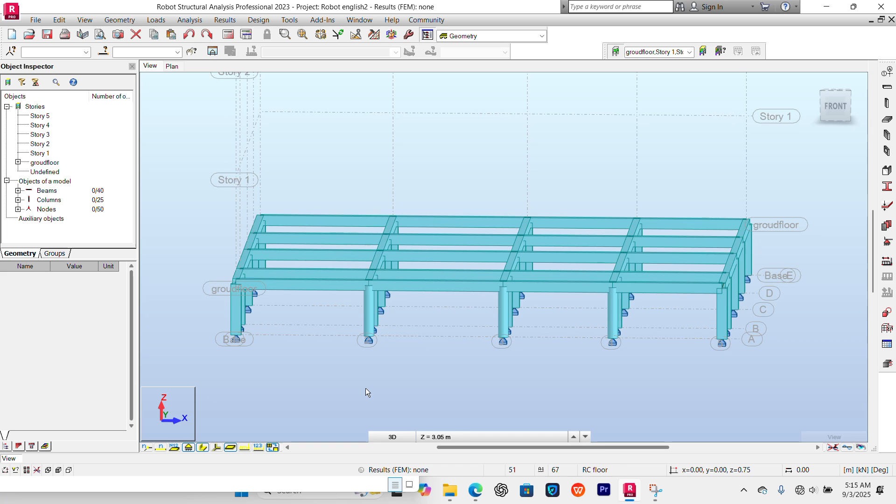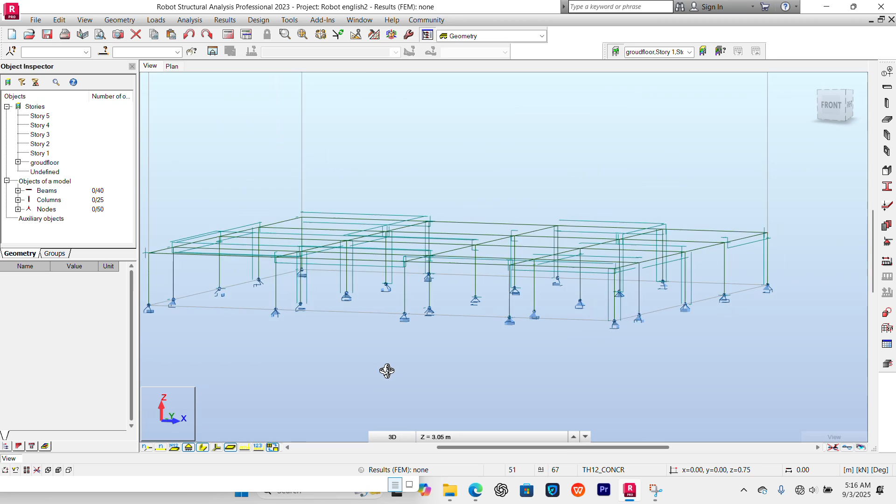Thank you. So last time we ended our lesson on the modeling of the foundation beam. Today in this new lesson we are going to continue directly with the orientation. We first of all check the orientation of our dwarf pillars. We'll go on plans, then we'll come here.

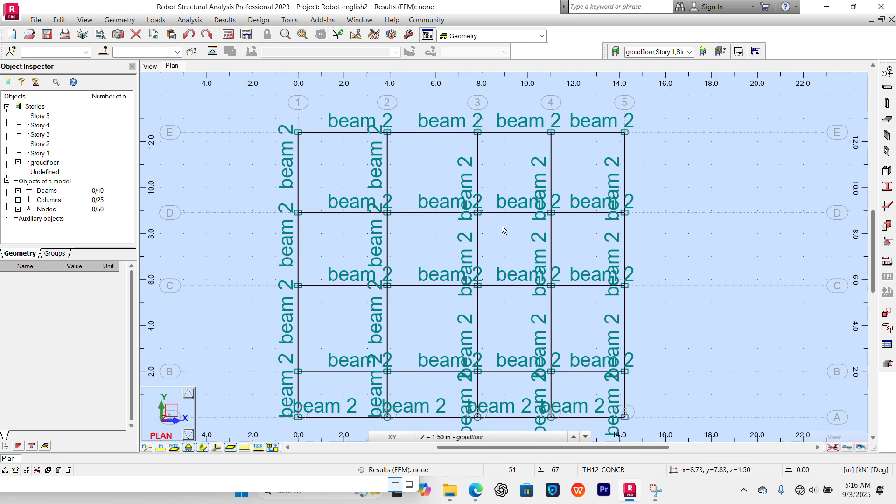First of all, you'll realize that the formwork plan has changed. Last time we started without a formwork plan. This is a formwork plan I found in one of my documents, so we'll be using it for this project. As you can see, it's the exact one I've modeled to the level where we ended. Today we are going to talk about the orientation of this column.

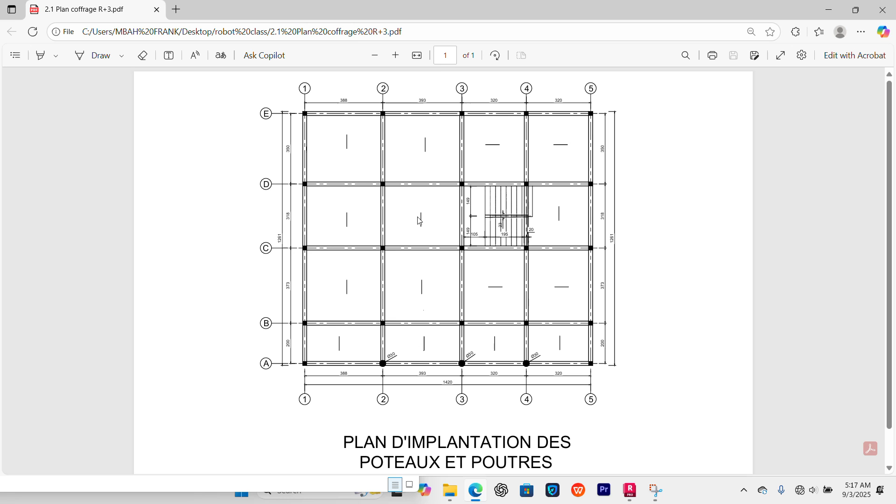One thing to notice is that on this formwork plan, the columns are all square columns, but on the project we decided to work with rectangular columns. The orientation of a square column does not matter, but for a rectangular column we make it in such a way that the width of the column should be oriented following the long span. That means the short side of the column should be oriented accordingly.

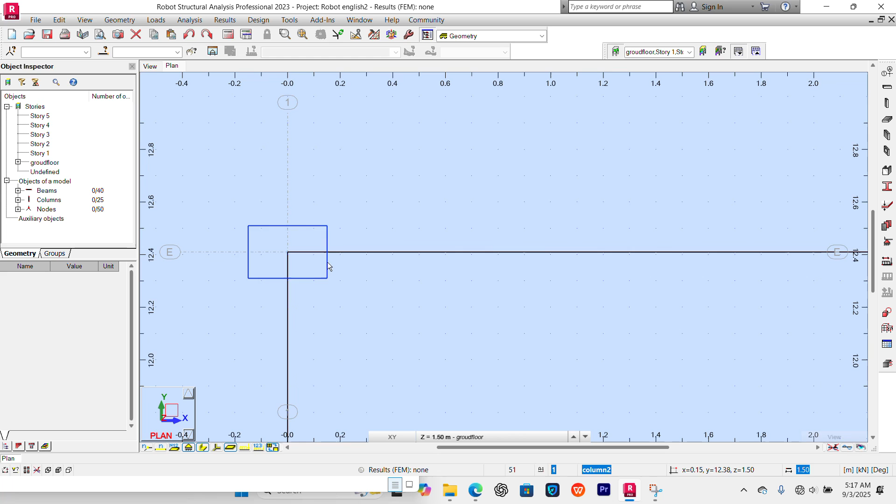If this is the longest span, compare this span of beam 26 and this span of beam 41 - the longest one is surely this one. The short side of our column should be oriented following this side. That's what it means - the width of this column should be aligned with this long span.

It's a mechanical principle to reduce the effort when applying the ribbed slab here, because if this is the long span, we'll be sending the rib beam this way, oriented along this short span. Obviously this column will have a certain deflection at this level which will influence this column here. So it's a mechanical principle that you have to check.

I've done this before in one of the videos, the orientation of rectangular columns particularly. To check that, we'll go on tools, take dimension, and measure this span to avoid missing it. Let's take it back, click here, click on this other joint, click on this other, then put the dimension. We'll ensure the dimension is there to control our span every time.

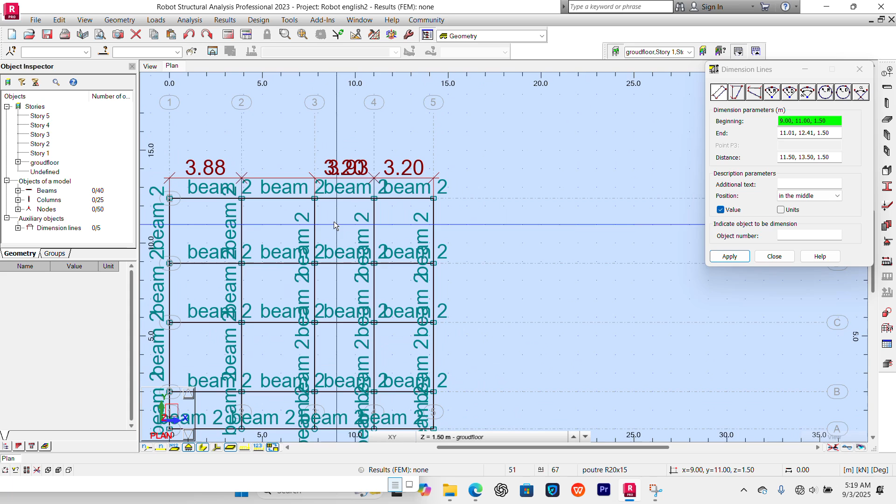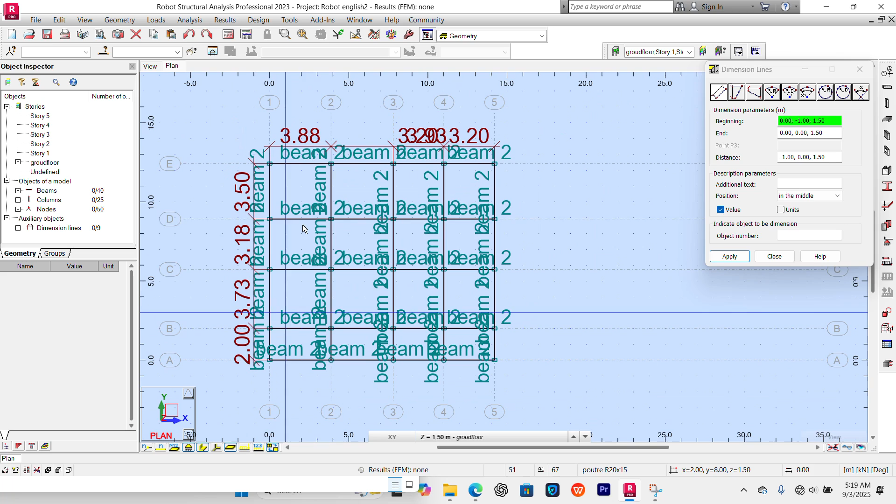This is to ensure that we are not making errors. Come here and put also the dimension on this side. Quickly put the dimension. That's it, we are done. Let's delete this one and draw it back. Dimension line - you go on tools, click on dimension, then you choose the dimension. That's it, so we have all the spans.

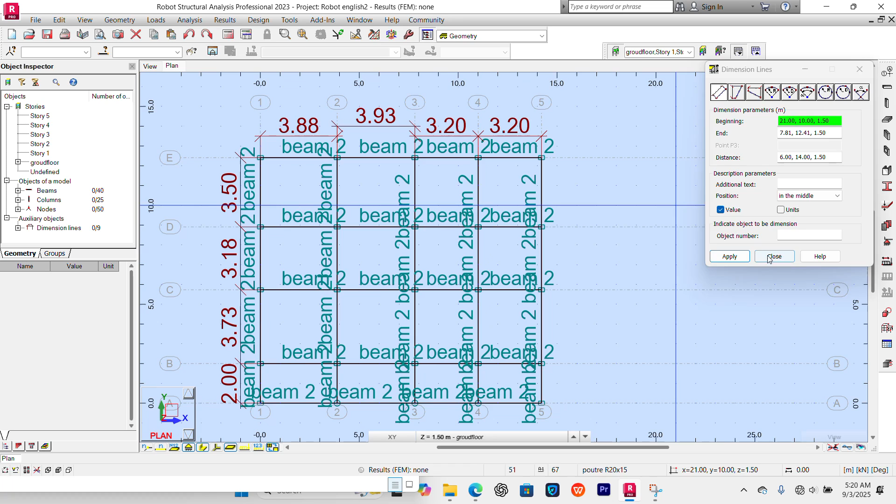Now we compare for a column that is at the junction of only two beams, like this beam and this beam - we compare the span. You'll notice this span is longer than the other, which is 350. So the column is already well positioned because the short side of the column is aligned following the longest span.

Now when we come to this kind of column which is the intersection of three beams, what we do is take the beams that are aligned following the same direction. For this Cartesian reference, we'll notice it's along the x-axis, as you can see down here. We'll subtract this span from this span, taking the absolute value. So subtraction of 393 minus 388 will give you about 0.05, that's 5 centimeters.

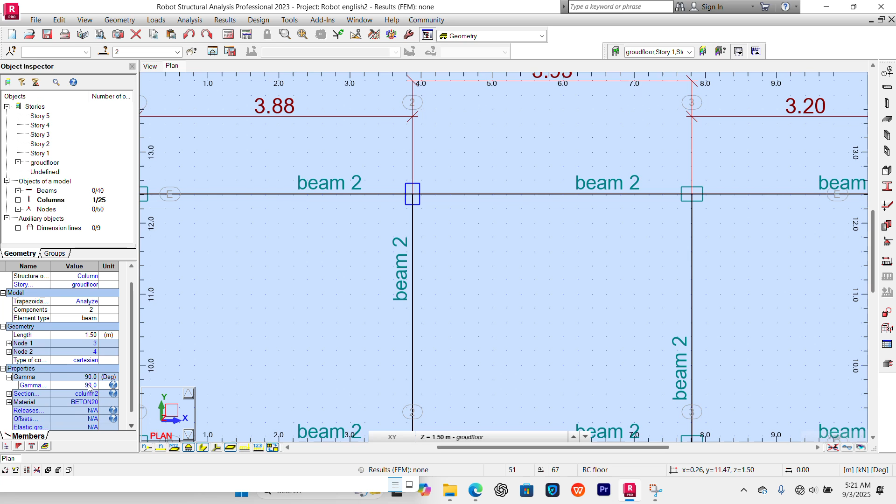Now compare it to this span only, because there is no other beam continuing this way, so you have 3 meter 50 to compare with 5 centimeters. Obviously 3 meter 50 is the biggest span. So we'll click on this dwarf column, come here on the object inspector, go down to gamma, enter 90 degrees, and press enter on the keyboard. The column has changed - it's now aligned following the short side, which is a rectangular column, aligned now with the longest span, that's beam 58 in this case.

Now let's take this other scenario where we have a column intersecting four beams. You take the beams along the same axis, the y-axis, like this, in this direction, following the y-axis as you can see on our Cartesian frame down here. So you'll take this span 3 meter 50 minus 3 meter 18, which gives us about 32 centimeters.

Now you subtract also 3 meter 93, which is for beam 44 here, minus 3 meter 88, which is beam 42 here, and you obtain the same 5 centimeters we obtained from the subtraction up above. You'll realize that 5 centimeters compared to the 32 centimeter difference from 3 meter 50 and 3 meter 18 is smaller.

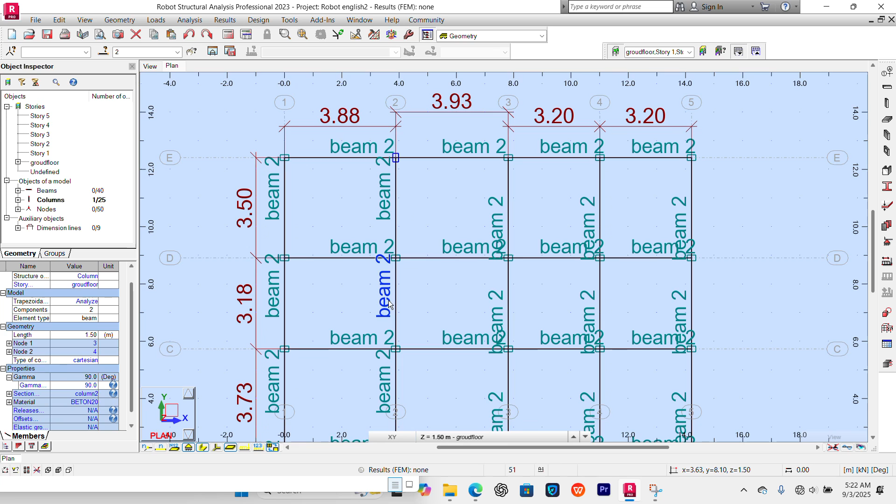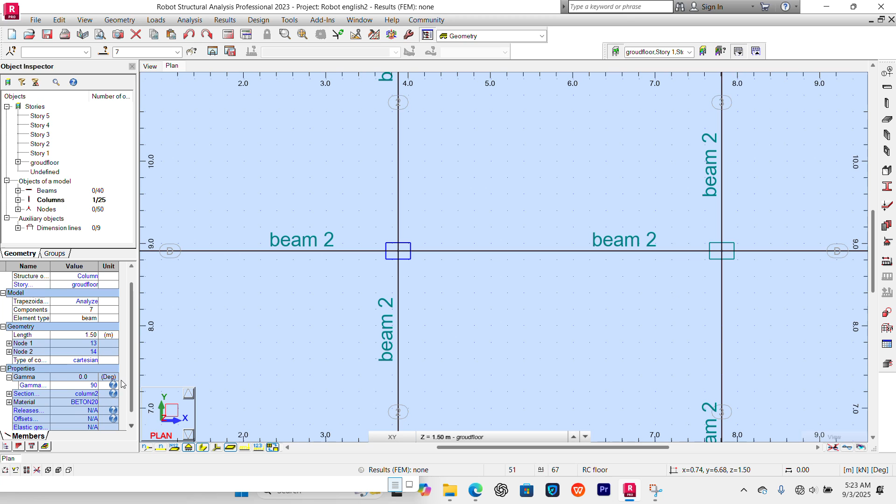So we orientate this dwarf pillar following this direction, the y-axis direction. We make it in such a way that the short side or width of the column should be oriented following that direction. So we'll come again on the object inspector and press enter. That will be it. So that's what we are going to do all over through this column, to check it all over and ensure that we align them following this principle.